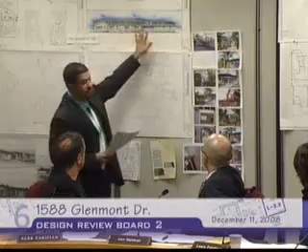If they're in the photographs, because I know some of that's existing. Okay, so to start with the windows: the front of the house has vinyl windows, I could not find any permits for it. The back of the house has wood windows and French doors. They're proposing to reuse those, since they've sort of maintained them - wood French doors. But for the front, they're not proposing any new windows, they're hoping to be able to keep those vinyl windows. Do you have photos that show this?

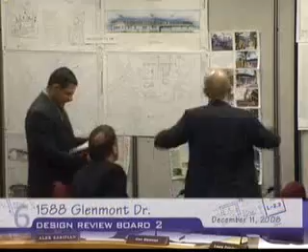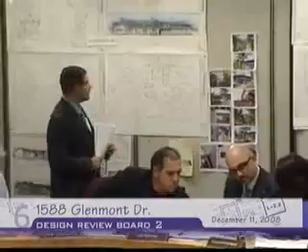Yes, I should have more photos here. As far as the stone goes, I have a better picture of that. There's just so much greenery that it's hard to see. That's probably one of the best photographs of the stone that they have added. We recommended that they change that to brick initially to match, and the applicant is probably going to request when he gets a chance to speak, to change the brick back to stone. And these are the vinyl windows in the same picture, yes.

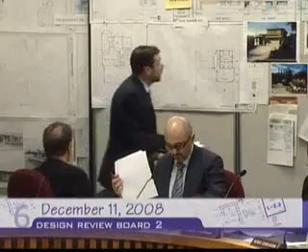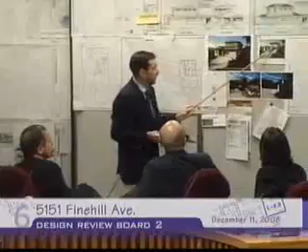Chair, members of the board, our next project is located at 5151 Pine Hill, case number 2008-063. It's a first-time submittal of this version, however this is the third time the board has reviewed this project. These are the older plans, and you've seen a version of this twice. If you look at the elevation or perspective here, you might recognize this one. It's located up in the northern part of Glendale, all the way to the very top, even Markridge Road all the way to the top.

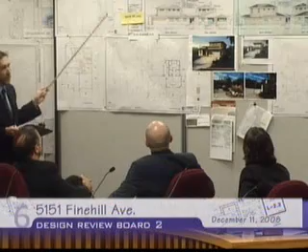Now, when this project, which was a B submittal, or the second time reviewed by the board, when the board said return for redesign, there was a code change that required the new one come back as a new case number. But it's the same project, so that's why I'm mentioning it. Just a quick aside, the project has not changed in square footage - it's still basically the same thing, which is about a 500 square foot addition to the first floor and about a 650 square foot addition to the second floor.

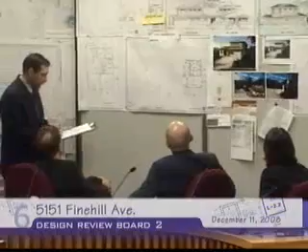If you look at your staff reports, I'll try to go through it briefly because you had a lot of comments that I carried over from this case number to this case number for continuity. It's pretty much the same in many of the issues relating to site planning, mass and scale, and design, except that the applicant addressed many of the concerns the board had last time. I'd like to go through the responses to the board's comments and conditions, and can go through it in more detail later.

At the last hearing, I believe there's only one person who wasn't here. I think the rest of the people were here. You weren't here either? So there was three. I'll double check that, because I know there was at least a majority here.

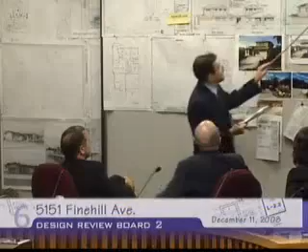The first board comment from the July 31st meeting was to raise the roof extension over the garage in order to minimize the apparent scale of the second floor. Here is the roof - the idea was to raise this up, and this is what the applicant is proposing, bringing it to the base. We have a condition relating to the same thing where we'd like to see a little space, maybe a 12-inch gap between these two, but this was their response to that.

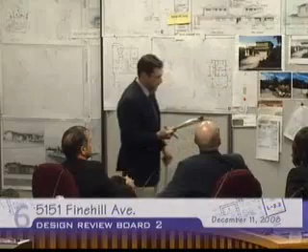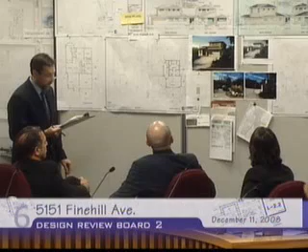Add a wainscot of possibly wood over the living room section. We had noted the applicant replaced the entry - they did a complete different change. This is a solid wall here, and they decided to go with columns, changing it up in that respect. They also replaced the wing walls. So regarding the wainscot, they don't have a wood wainscot over the living room section, but they do have siding placed all around the upper part of the house. They also increased the size of the living room window from the smaller version to here, maybe a foot wider.

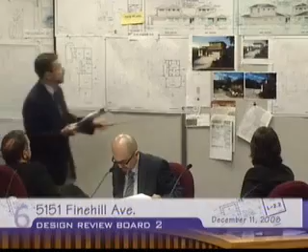Raise the roof to incorporate the second floor deck, so you only see the roof and not the railings. Here you can see this railing element was more visible, and what they've tried to do is pull the roof up so there's less railing visible. They've also reduced the size of this deck - it came all the way here and has been pulled back, which is pretty visible in the plan view too.

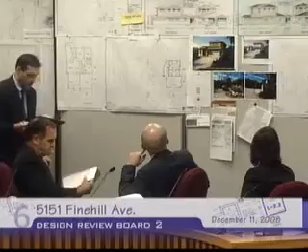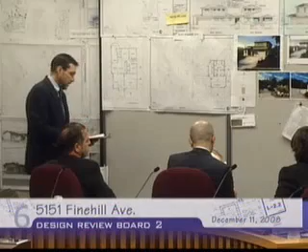Consider using siding on just the upper floor, which they have done. Consider a hip roof similar to the garage at the second floor - it remains the same, but does give a lower appearance to the second floor because they've raised that roof up. Overall, staff felt that the addition appeared consistent with the design guidelines' intent for site planning, mass and scale, height, and the overall design for this neighborhood.

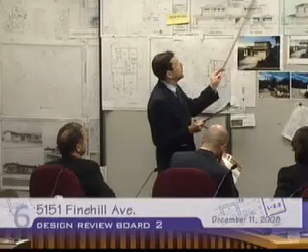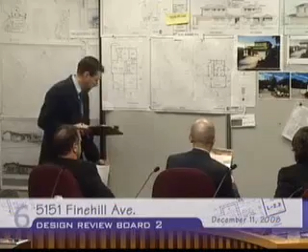We did have a couple of conditions. One, which I've mentioned before, is providing some space between the top of this roof and the base of those windows. The second is that the applicant, for all three submittals, has proposed vinyl windows. We're requesting, as a consideration, fiberglass or wood windows rather than vinyl. In either case, whether vinyl or fiberglass, we want whatever grids they may have to be external grids on the face. That pretty much wraps up my comments.

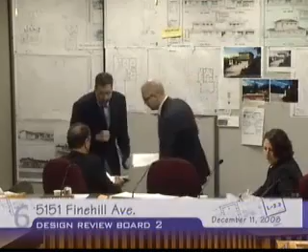Questions? First, the letter of support we received - can you show me on the map where that house is in relation to this? The address was 5167, here in the cul-de-sac, at the top. So they're not an adjacent property, they're up above.

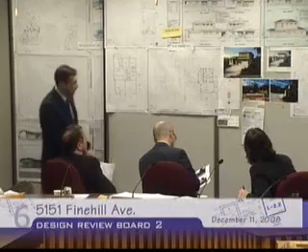Secondly, in their elevation rendering, what is the surround that's around the windows? Is that called out on the plan? Yes, here's some - it's actually just wood trim, right here.

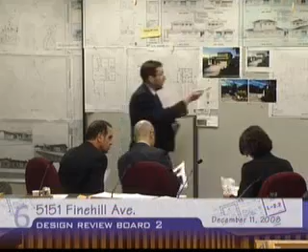And do we have a garage door shown? He's just showing what door it is here, but that's not necessarily the actual garage door - I'm sure the applicant can address whether that's the final design. Okay, that's what his proposal is.

Right, thank you. Yes, sir.

We have one card, Saroj Zafani. Well, once I close it, I mean, you can go ahead and, yeah, go ahead.

Mr. Raj Musarkani, I'm the applicant, the owner of the property. I think as Mr. Baxter mentioned, we tried to address almost everything because there's a lot of comments and conditions.

And I wanted to thank Ms. Friedman, as much as it wasn't pleasant to hear what she had to say, but it helped in that a boring house to us became a much better looking house. Because what she said was it doesn't say anything to me, and that was said a lot. Initially, one gets upset, but when you look at the plans, it really didn't say anything. It was too boring, so even the garage door looked boring.

So I changed it. Because if you're changing the facade to look better, such as the wing wall, once you change it, you realize why a wing wall doesn't look good to someone who's experienced, because it's too boring. It came down to what the house was going to eventually look like. You look at our original design, it was too much - the tower and everything, it was all the stone.

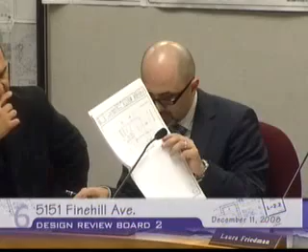So, the first floor is in the rear side, and everything that you're putting in, and the rest of the stuff stays. Everything stays. Now, your architect has sketched up a very nice detail of what he's proposing to do, but if you're keeping the existing windows, you're not going to be able to do this.

So you're going to have these attached pieces of trim that are going to get attached onto the exterior framing of it, or I don't know what, I didn't...

I'll address that. There's two options we have. Either one is, as the Chairman mentioned, that we will just be making the frame, because right now we've got both vinyl and some aluminum, and when we bought it, it was like that. So it's not consistent, with even a couple of wood frames just going around the window. Either we can change that and make them look good and consistent, or in fact the windows can come out and be reused and placed back into the wall. But this was done to show the new windows and how, because the staff wanted to know how the frame and the windows will be placed, with the stucco and integrated.

Thank you. Sure. Session's closed. Yes? I was going to say... We have... Donnie, the details. Do you have both sheets, though? Yeah. Okay, all right, good.

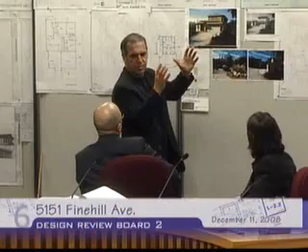I have one question from the board. I'd like to know what you guys think. As I was looking at this perspective, I felt that the top, for two reasons, felt kind of almost shearing from the ground floor somehow. And I realized that this piece that comes out actually projects outside of the garage wall. So it seems like there's a weight almost coming down on it, see it up on the top right. I wonder if that's necessary. I mean, it's like part of the master bedroom, but how much difference it might make?

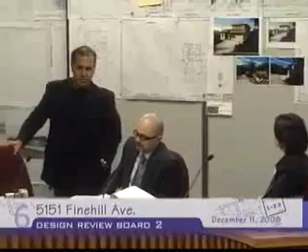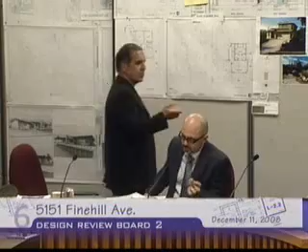There's a... it's like flying mass over a light roof. It has a sort of a conflict of weight to me. Then I agree with you in terms of somehow only the top separating itself by a different material. It feels like it's almost too separated, but I couldn't figure out how to fix that.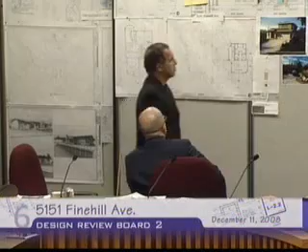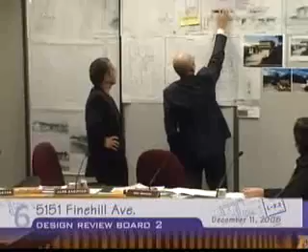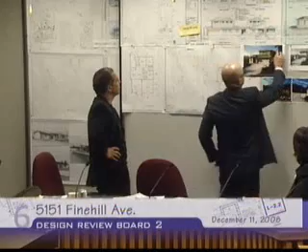It might be that if you eliminate one, it might look better. Well, there is another solution there. I don't know if the bed is supposed to go there or something. I don't see the layout, but what it can do is, if you look at the elevation, you can see this line already. So what would happen if this section comes down, so this roof carries over, and this becomes more of a bay window element there? That becomes, on the side, the roof is a little bit lower. You still have that niche, and you can see that carrying over the top. So you mean shape it and put a window there? No, what I'm saying is take this, lower it maybe a foot or two, so that you have two separate roofs there. You have a shed roof kind of a thing, and then the base that kind of comes down on this eave looks kind of odd.

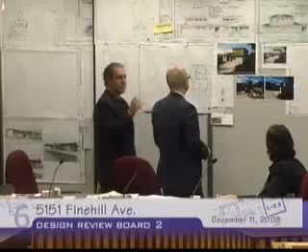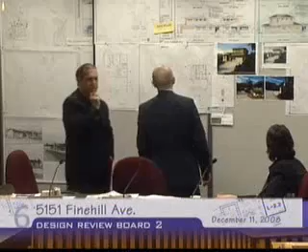But if you lower this, you can see this carrying over, and this becomes just an attachment. But again, that's something you guys can decide, or ask the applicant how important it is for them.

If I could introduce myself again, Saroj Masarkani. That extension or extrusion occurred because in the initial hearing, members of the board did not like that there was a straight wall up facing my neighbor to the north, and the house looked too straight up, so they suggested that. That is based on suggestion from the board.

Now, in terms of how it can be manipulated, I think as we talk we can work it up. I'm just asking so we come to some sort of cutoff point, because there's good ideas. We can work this to an end, but the perspective, as good as it can be, is not exact.

It doesn't go on top of the roof skirt there, it ends before. I thought it looked a little different. The wall below feels like it's beyond where it can come down as something that has weight to it, on an extension of a roof.

I think it was sort of the one point I had, which was that the roof gets extended to the side more on the front in order to kind of encapsulate that piece. But I'd rather actually see the roof back a little bit and then put brackets under it and just treat it as an extension, a separate piece. It's a small element, it's on the side, I don't know.

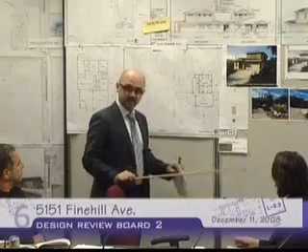The second thing for me, I think, first of all, I really like the evolution of what we're seeing. I think it definitely evolved towards better. I agree about the siding, and I think some of the siding should be carried down below rather than having complete solid plaster and the siding above.

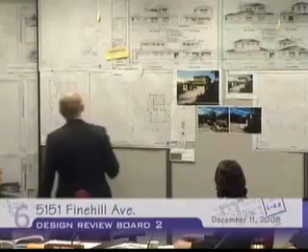I think there is a place that I think we can make this thing work, is that this section right here has a perfect location because it's tucked in. You have this recessed section, you have this wall. So this little section can have siding kind of in a corner, so you have this siding condition here that represents part of the upstairs, and that brings it down.

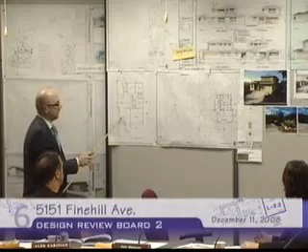And that brings me to the second point. I think proportionally, the wall that you have, and also, I don't know if you've noticed, the function behind the window, I think the scale of that window in relation to the wall, that's another thing that is kind of bothering me.

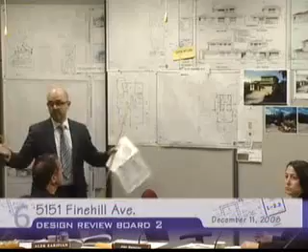So I think if we can reduce that a little bit, proportionally that window will fit much better in that wall. I think it needs to be a picture window rather than one large window, and I think it definitely will work. And whatever you do on this window, if we decide, was that?

That was the request last time, to a bigger window. Well, I wasn't here, so I can say whatever I want. So you guys deal with it.

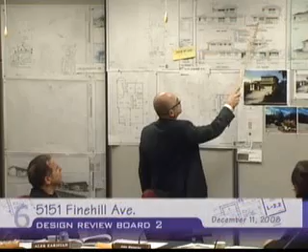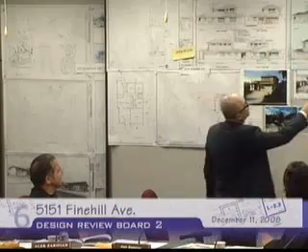This definitely is not the proportion I'm talking about. I think it should be just a tad bit shorter and then more of a square look, I think that's what I'm looking for than anything else.

But it does match the windows on the second floor, which is kind of nice. Yes, but the proportion of this window versus what we're looking at, I think it fits better than this versus all of that.

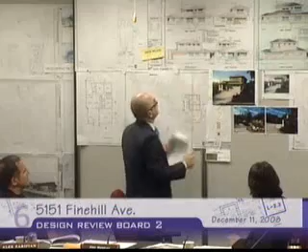That's my opinion, so you guys can kill it if you want. The other thing is if you look at the perspective, I think the top is really slender, and the columns are very thin carrying that. It seems like you could just take your hand and knock it off.

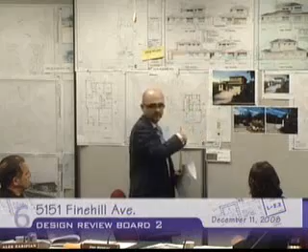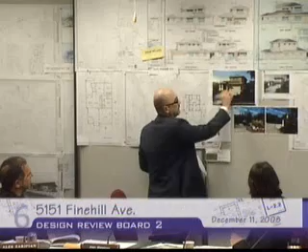So I think by adding a little bit of mass here, just a tad bit - the way it's drawn is fine, but when you look at the perspective you really can't see the top part of the column. At the bottom of this, I would consider adding or fattening this base and then bringing it back towards the wall, so you have a substantial base, and that can even be stone or brick or siding, whatever it is you're carrying through.

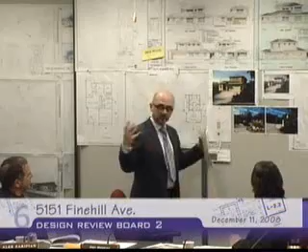So I think that, but you still have this open - I'm not talking about just a small little base down here. I think it would give a lot better presence on that entrance rather than what you had originally versus what you have now. I think it's the complete difference.

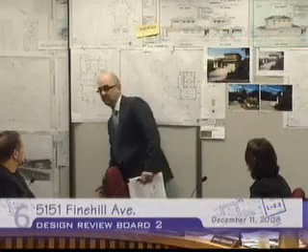What about the front door? The front door I'm okay with. I would also have them consider using a more quality garage door than just painting it to match the stucco - I think it needs to have a little bit of contrast there.

Can we ask them about - I think your idea of the placement of the siding is a really good one because it balances it too. Where you have the siding on the second floor kind of on the right, and then if you add it to the left, it really balances the two pieces together. But I wanted to ask them if they had any strong feelings against it, because otherwise that would make... Can you come back up again for the last time, I think?

That's fine. Did you have any feelings about that? Because I think it's a really good idea. Once again, since I'm required to mention, my name is Rosemar Sarkani.

Actually, I don't mind it at all, because we thought about the idea - we were going to not make it all siding. Even though the entire second floor we made siding, because it just looked better rather than having it stop halfway. But on the first floor, because there's not a whole lot of wall, that was our problem. If you put it there, that's the only place you can actually put it and make it work, but then there's no more stucco left, which is fine.

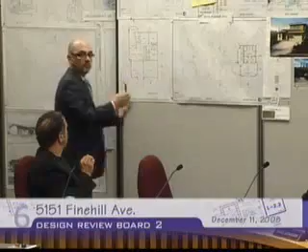And that's what you want - you don't want to have siding that ends right in the middle of the wall. You don't want this to carry into the middle of the wall. Right now it will start at an intersection of the wall and die into another wall, so it's a perfect location to create or add a detail. Now that the siding has already been used, carry that down so it balances the top.

One suggestion, in what Mr. Malakian said - instead of going all the way, because we'll be blocking it with a short bush and brush, since we're almost 15 feet above our neighbor to the south, and we'll have a living room window. In order for us not to be able to look down onto their front parking or porch, we'll be having some bushes, so going from south to north you won't see much of that south wall.

How would you feel if your wife is okay doing siding on the side? Because she wasn't very crazy about it, but when we did the top it looked good. We looked around at the neighbors, and they'd done 2 or 3 new projects with this cement fiber - really nice, kind of thinner, not the old kind - it looked really good. So when we did it, it looked good.

So I think even on the side it will look good, but not go all the way around, because then it looks like we've completely done it with siding. But then again, if you wrap it all the way around, it should be fine. I think if you end at the corner, I don't think it's going to look good.

I think I'm saving you some money by having you put siding rather than stucco. So you should be happy doing siding rather than stucco. Would you make it a consideration? If we do it, we will go all the way. But I agree it's like dark pants, light shirt, you're split in half. So somehow we'll have to mix them.

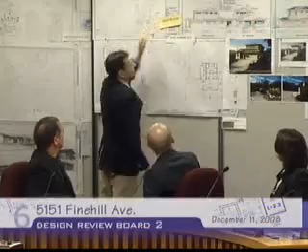Mr. Chair, members of the board, we have 9 feet to this point here, so I want to make sure whatever that pop-up is, that it's an R1 setback of 6 feet. We had the setback anyway, because you already had it there.

One last consideration.

The peach color of the stucco - I've never talked about colors, but I think the peach color is something to consider changing to something a lot more earthy and warm, more like the other two colors. I think you should use the same kind of color family.

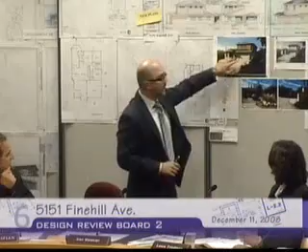Well, the color you have in the perspective, I think it's fine. I think this color is fine. The plaster you're showing in the perspective, the lighter color is fine. It's just the peach here, the way that it is - it's too much red, it should be more like cooler, like the perspective.

So those are great suggestions. The one I would make a condition is to continue the pop-up all the way down and put the siding going all the way down the pop-up. Very nice. I think the rest of it, I would go either way - I'll leave it up to the board about the other part being siding. I think it would look nicer, but I'll leave it to you guys. I think it will work better if both sides. Okay, I think so. Let's make both of those conditions, especially since they're amenable. I think it's going to be beautiful.

Any thoughts about reducing the size of the window? I think it's unfortunate to reduce it. I know there's an issue about the barn back, but I do think making it smaller is not the way to go. We can make it a consideration and leave it up to them.

I just really think that wall with the window is just too big. Not changing.

This is almost a resolution at this point.

There was a concern mentioned about the material of the garage door and the front door, and in checking the plans, it appears that it's not clear what that material is, so you may want to consider making a condition of what the material might be.

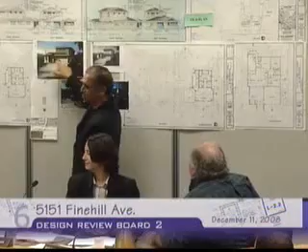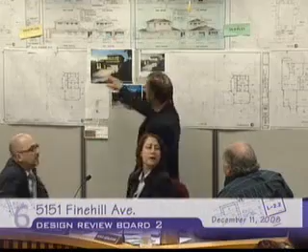So you like the windows, but more horizontal? Yeah, but not divided with the same color—keep the color, but I think it will read better with the rest. So no windows, or no panels? Windows are fine, but not panels. Keep the windows, remove the vertical. They're kind of foreign to the horizontal, in general, you know?

I mean, it wants to be simpler. I think sometimes the windows come like that though. I don't know if they make a raised panel without the vertical. They can make this exactly like that with windows, so that it's one panel on the one section—is it just one panel, horizontal kind of line, or just lines? No, vertical line.

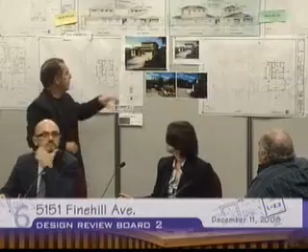I think when you look at the elevation, the windows will come out better if this vertical element wasn't there.

The reason we're asking is because the way it's drawn looks like it may be shown as a more typical aluminum roll-up door, and if the board would like to see something else, they may want to specify.

No, I think the one that I talked about is the sectional that goes up horizontal—sectional, not roll-up, sectional, but smaller section. Right, the sectional that kind of rolls and goes up.

But regarding the material, wood would be another option. Yeah, I don't think that's... No, I think it's fine, but I would agree—let's make it a condition that it not have the vertical elements.

You want to read it back? I can go through and he will. And there were some considerations on the front door—what about the front door? Did you have a comment about that too? The front door's fine.

I just wasn't clear what it was, because when I look at this there's a lot of different materials, and it's talking about different sections of the door—I'm just not sure which door out of all of these, the one with the red around it, I can't tell. The front door does not appear to be specifically noted as to what material it is. He does have a brochure here. Right, but the brochure, I was a little confused.